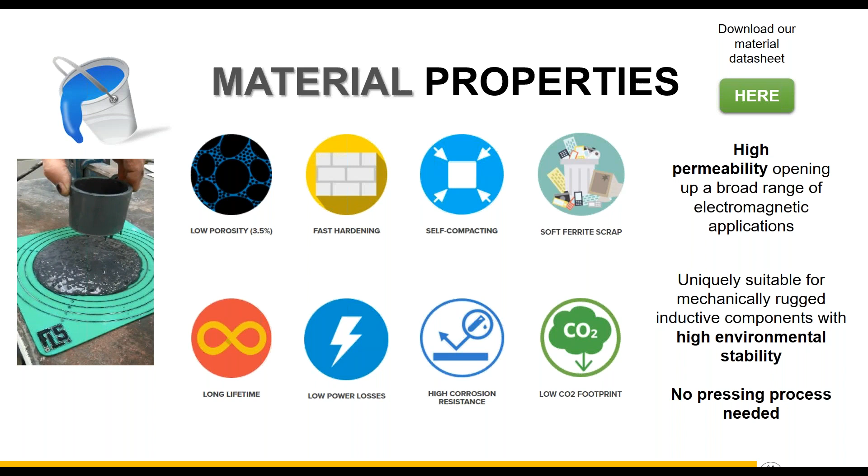And so in this next slide here, on the left, you see a video of a standard test used in the cement industry to demonstrate the flowability of our material. So that's going to be the first important factor that makes it really good for customized inductors, as I'll try to explain during the course of the presentation. And on the right, you see the other important factor, which is that there's absolutely no pressing process required. So with MAGMENT, you really just pour and go, and that makes this whole process extremely cost effective, which is an important factor for us.

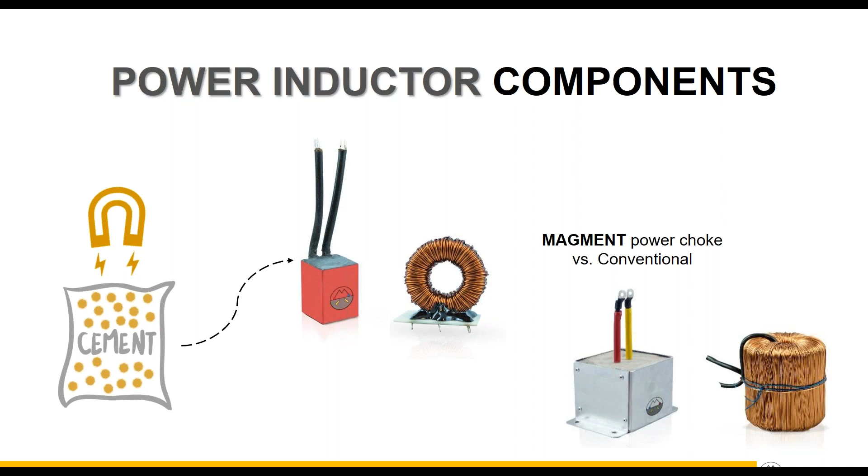So here we just wanted to show you what a MAGMENT inductor looks like in comparison with a standard toroid core. And so ours is a quadratic rectangular geometry, and here we only have the single phase pictures. Later you'll see some of our three-phase designs also.

And the flowability of our material really is the base for our design philosophy, which we've called geometry versus material. So in comparison to more standard Excel calculation tools that go through catalogs of inductors and combine them to provide you with a part, our philosophy is to really design each inductor as a new component. And the way we do that is by optimizing all of the available geometry. So the MAGMENT material is both the core and poured around the core and the winding, thereby filling the whole space and enabling an extremely optimal magnetic field line concentration to achieve the desired electrical performance.

And therefore this would be what we call a more integrational rather than differential design methodology. So instead of concentrating on material improvement at a given point, say in a core or at a point outside it, we consider the inductor as a whole. And the breakthrough here, and we're really proud of this as a company, was to offer this as an online software to really send this out to the customers and allow them to design their own inductors.

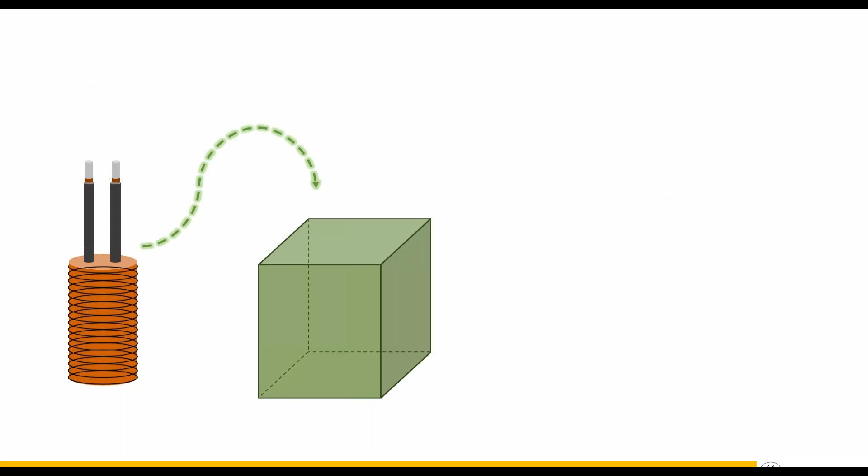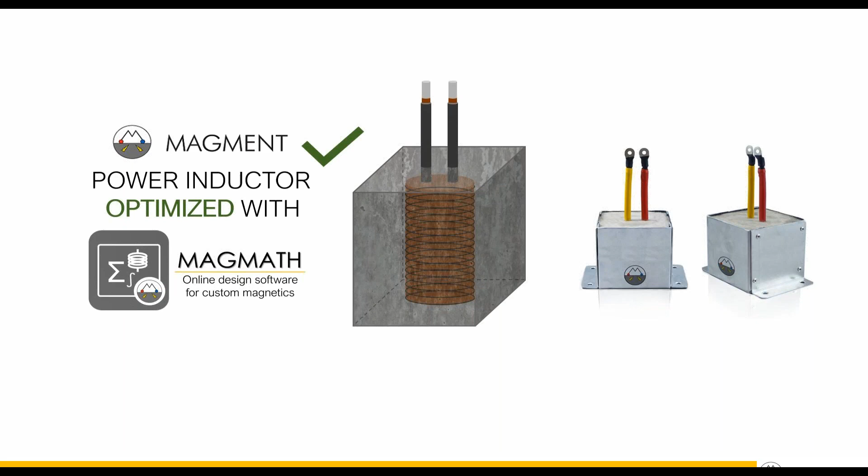And this is highlighted here in this video, just a schematic of the process. So the user sends in just a few standard electrical data, which then run a live optimization of a design on the website. Right, and then you see here this process which I talked about earlier. So the winding wound around a MAGMENT core, which is then put inside a box, and then more MAGMENT is poured to achieve the exact specifications that are required.

These are the three main factors that run the backbone of MAGMATH, which is the name of our software. The first is a hysteresis model that was developed by Mauricio Esquerra, and the link to the paper is in fact on the FAQ section of our website, so you can see his model there. We also additionally have a pretty advanced modeling of the winding that we use to accurately model the skin effect, proximity effect, and other such things.

And then finally, to be able to achieve this integrational approach that I talked about earlier, we utilize what's called a genetic optimization, and I'll show you a really nice animation in a few slides that indicates why this is useful for the type of design process that we have here.

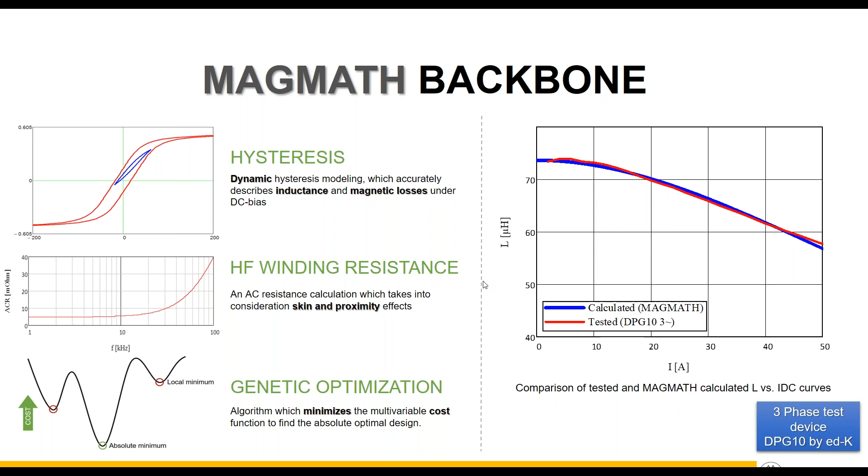So let's talk a little bit now about the interface of the website itself. For those of you who have used MAGMATH before, you'll notice that this is a new interface, and indeed this is something we've been working on in the last couple of months since MAGMATH 1.0, based on the feedback we received and our own experience in the time since then.

So now, the first major thing is that the inductor is now going to be designed right on the homepage itself, and we've streamlined the number of inputs to make the process much more intuitive. For those of you who are familiar with the older version, the dimensions and some of the additional loss parameters that could be input have been streamlined, and now we're calculating much faster internally. So let me just walk you through the inputs.

So right at the top, you have the inductor type, and you can choose AC/DC, and the design single or three-phase, and I'll show you a comparison of those two designs later on in the presentation. So we need three mandatory inputs to run the problem, and the first two are kind of obvious. We need the nominal inductance and current. We need the working point.

The next couple of inputs are to customize the curve, so you can specify an L0, and then for the losses you can specify an IRMS or a ripple if it's not standard, and you see there the little subtitles indicate that we have default values, so you can leave everything blank if you wish.

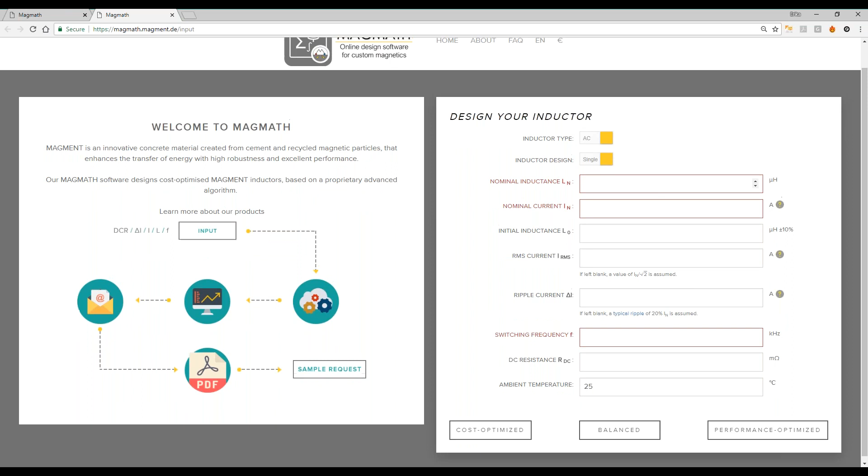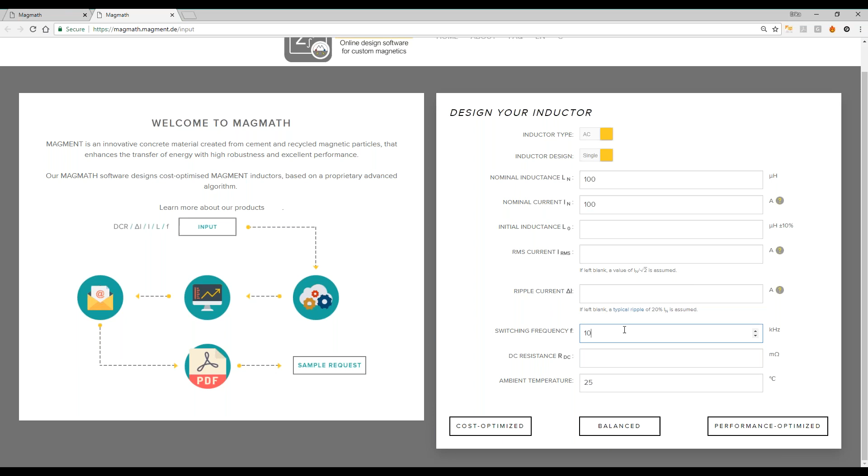So let's go over to MAGMATH and run a problem. Just gonna pull my browser over to this page here. Okay, so this is the interface that we just talked about together. The standard test problem we've been running, just because the numbers are nice and the inductor sizes are sensible, is 100 microhenries at 100 amps with a switching frequency of 10 kilohertz. And so let's just go ahead and run a cost optimized design.

And you see step 0 is here, the initial problem analysis, analyzing the parameters so that we can send the optimization routine into the right place. And that's in fact what I want to talk about now while this design is running.

So earlier we had a 4 or 5 step optimization routine, and now we've streamlined it down to 2. The first step is the most important, and this is a global optimization that takes place in a really high dimensional space. There are a lot of parameters that can be varied to generate a huge number of possible designs. And so what we need to do here is play with the parameters to make sure that we find this working point correctly and zero in on the right region of parameter space.

And then, of course, if DCR is not entered, we do have internal checks to make sure that our designs are always sensible. And so this is the first step, and internally we refer to this as a global optimization. So figuring out where this thing is going to be.

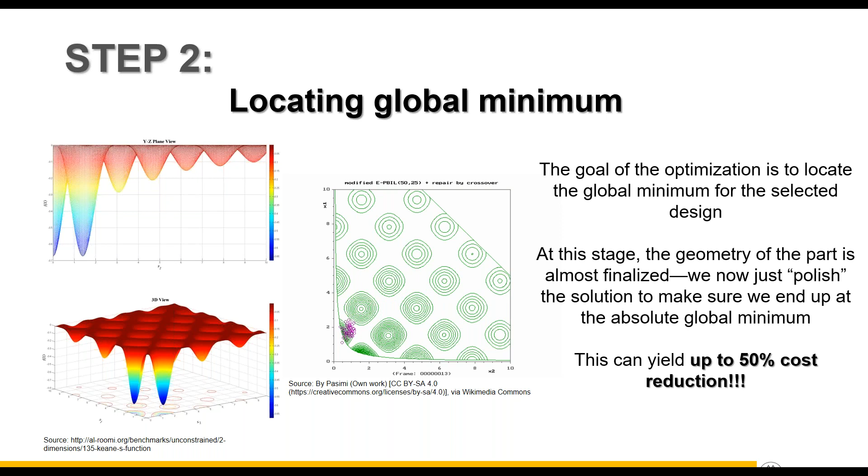And what you see in the animation is that the genetic algorithm almost always finds its way to one of the 2 deepest valleys, which is exactly what we want. We don't want to get lost in higher dimensional parameter space, but we want at the end of the day the cheapest or the best performance or a balanced inductor that conforms to our electrical specifications. We can say with a reasonable degree of certainty that this is as good as we can do, and that's what the genetic algorithm allows us to achieve. This is done here in the meantime, so I can just show this to you.

And so this is an example of what you'd see for a standard test problem, as I say. You have here the dimensions, and the mass, the L versus I plot, and then some additional loss information on the right hand side. So the starting point of the curve, and then the loss information. And then here you can download the results as a PDF.

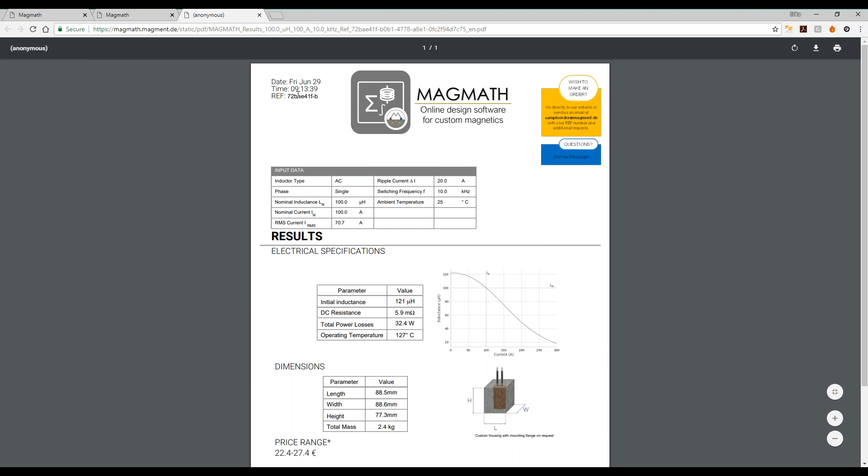So you can always save this as a reference, and if you are happy with the design, you send this number back to us and we can pull up that design and send it to you. You can also order a sample right from the website here. If you just submit your data, we receive a copy of the design that you ran, and then we'll be in touch with you within 1 or 2 business days with a sample offer.

You can choose to run a new calculation, change these parameters. So if you're not trying to retrofit an exact part, but want to go plus or minus 10 or 20 in either of these parameters, you can do that. Our software is free to use for as long as you want, and as many calculations as you want. So you can really take your time and zero in on the right inductor for your needs.

And then finally, this was the new feature that we added. So I mentioned the cost optimized, the balance design, and the performance optimized. And obviously, we wanted to give you the option to toggle between these three. And so this will now run a balance design. And at the completion of this problem, I'll toggle back to the browser in a minute. You'll see the two results side by side, so you can really compare the two.

And I can show you this here quickly. Well, I guess that slide got left out. We can just wait for that to run. So this is the cost optimized and the balance, and you see we go from 2.4 kilos to 5. So you go up in weight by 3, you go up in dimensions.

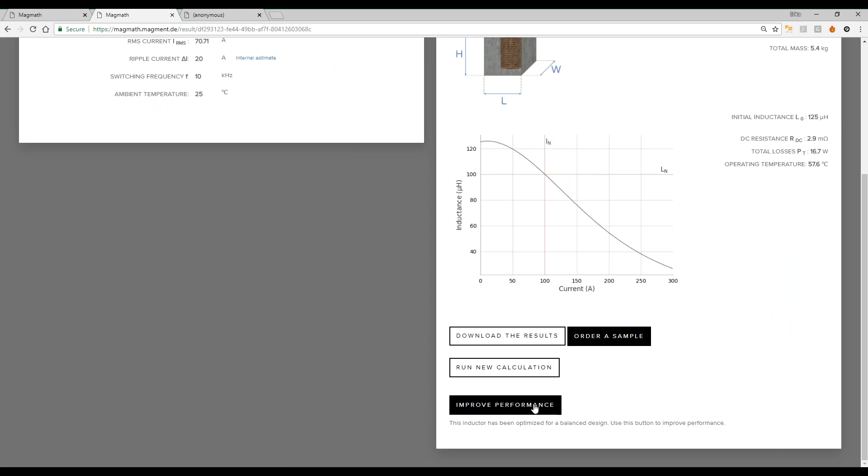But if we compare the losses, you go from 5.9 milliohms, 32 watts and 127 to 2.9, 16 and 57. And then if you improve performance again, you get the final iteration. So you'd see another tab here that says performance optimized, and that would be still larger with a much lower operating temperature. In fact, in this case, it would barely heat up at all.

And for those of you who are accessing this on your mobile device, I just realized that because of the resolution, you might have to zoom in to read some of the numbers. But I hope that the concept is clear. And as I say, you must run these problems just to play with it and get a feel of what the software has to offer. I'll just run this here, so we can do a side by side of all three.

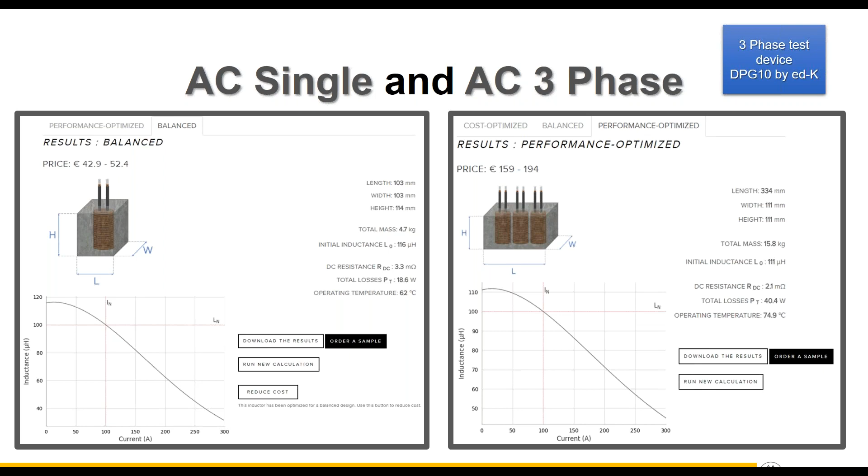And in the meantime, I'll show you the other comparison that we wanted to highlight, which was between the single and the 3-phase. And so in this case, this is the same test problem. And you look at the price range, for example. Oh, beg your pardon. It looks like this is an older version; one of the slides didn't get updated.

In any case, what I wanted to say, I'm not sure that we have the time to run this live now, is just a side by side balanced performance, say, of the single versus 3-phase would show you the cost savings in designing a 3-phase with our system as opposed to say using 3 single inductors side by side.

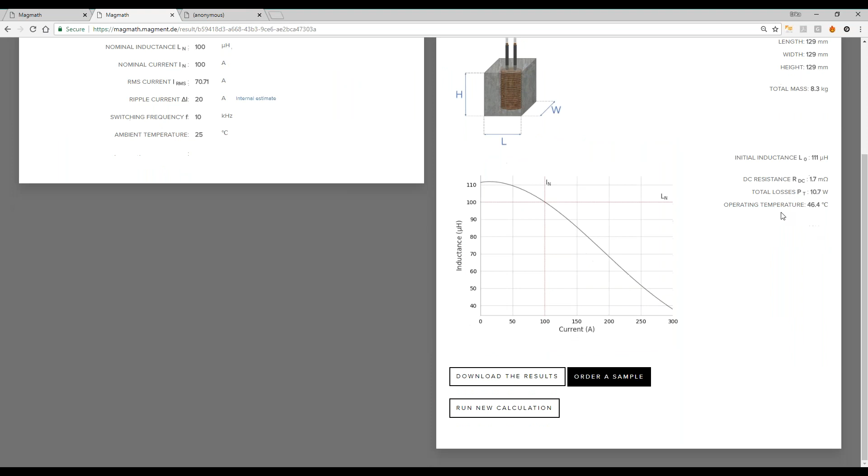Okay, this is finished. This is what I wanted to show you. So now you have the side by side of all three. So we'll just look at the mass, for example: 2.4, 5.4, and then 8.3. So you go up a certain factor in each case, and you save a lot in the losses. And then for each of these calculations, you always have the result. You always have the option to download the PDF or order a sample or run new calculations.

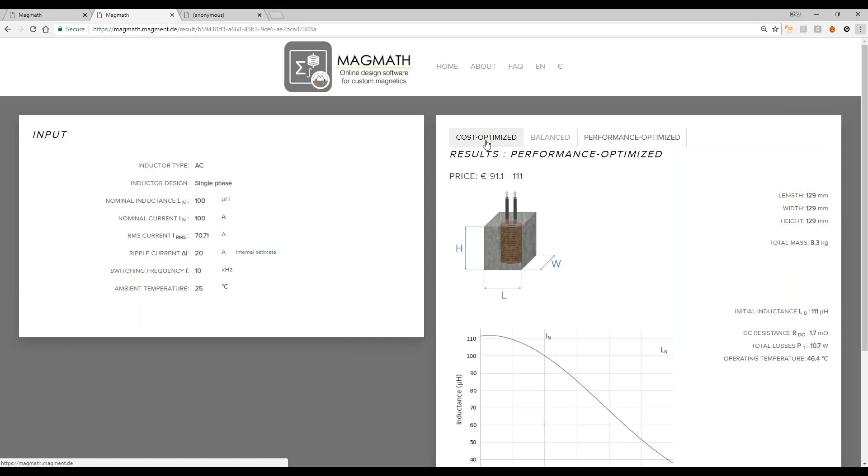I think as the last point about the optimization process with genetic optimization: we are in most cases optimizing a scalar function, a single cost function. This means that in this higher dimensional space, there may be several geometries that correspond to an optimal cost. So you may notice as you run the same problem multiple times that there are differences in length and maybe smaller differences in mass, but the price will always land you in the same range. That's the trade-off when using a genetic algorithm in this complex higher dimensional space: guaranteeing a unique repeatable solution every time is just not mathematically possible.

So you will notice small differences if you run the same problem again, but they will be minimal.

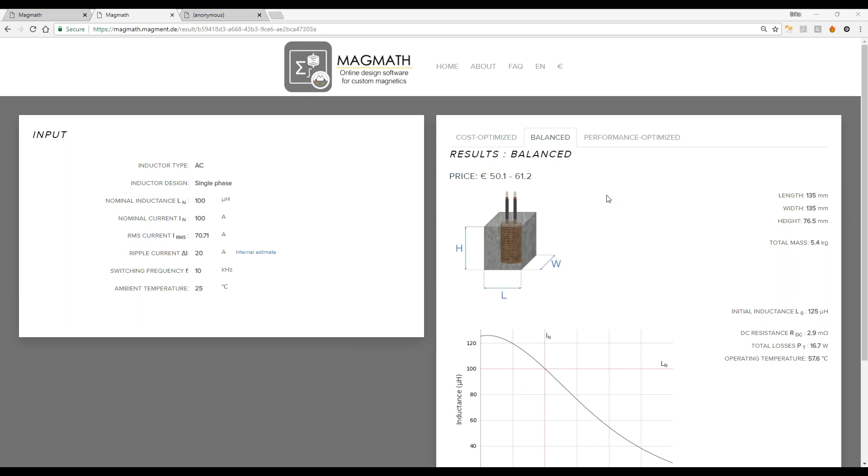Good, and this would be a good point to... sorry, I just need to find the presentation again. Oh okay, I guess I hit escape at some point and we exited. If you've seen all of this, I just have one or two slides remaining, and then we can jump right to questions.

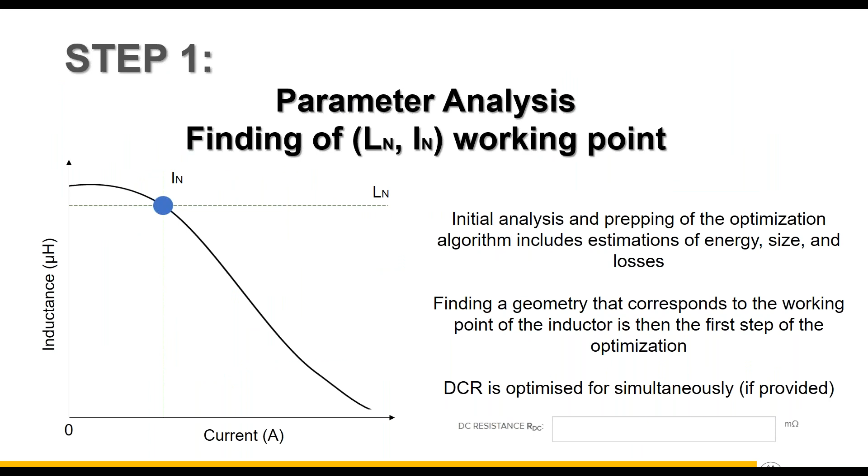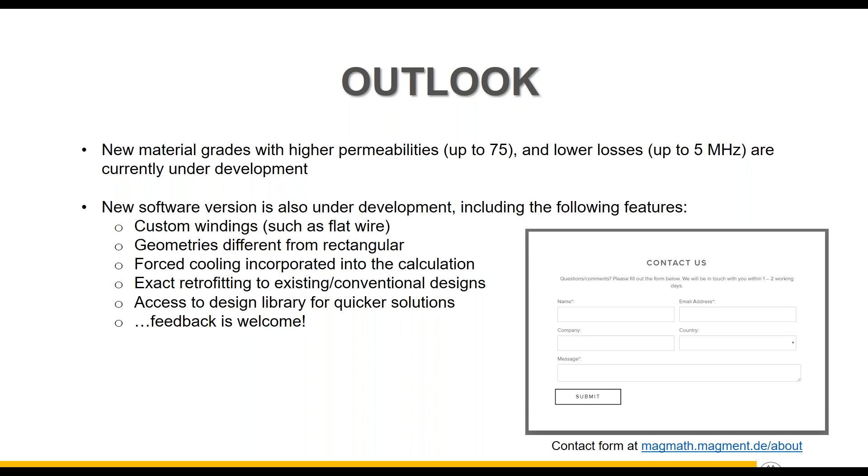I'll be happy to take questions for the next five minutes or so. Just as a caveat, I'm an engineer, I understand inductors a little bit, and I wrote the software, but Mauricio is our expert and he apologizes he couldn't be here personally today. If I'm not able to answer all your questions in detail, I'll write them down and get back to you with a detailed response once I'm able to speak with him. So with that, I'll turn on your microphones and we can have a conversation.

Sorry, or you can unmute your own microphone rather, because if I turn them all on it would be a little bit loud. So if you have any questions, just feel free to unmute yourself, and I'm happy to answer.